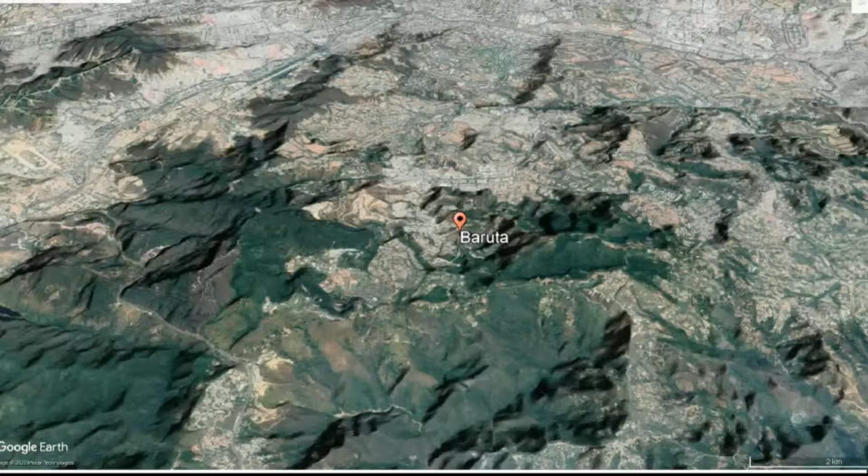Most of them have been built spontaneously. They function as villages with hybrid uses promoted by their own communities. Some have developed urban facilities according to their needs, creating their own communal spaces, but lacking public open ones. Others are monofunctional residential areas, meaning their inhabitants have to commute for other activities.

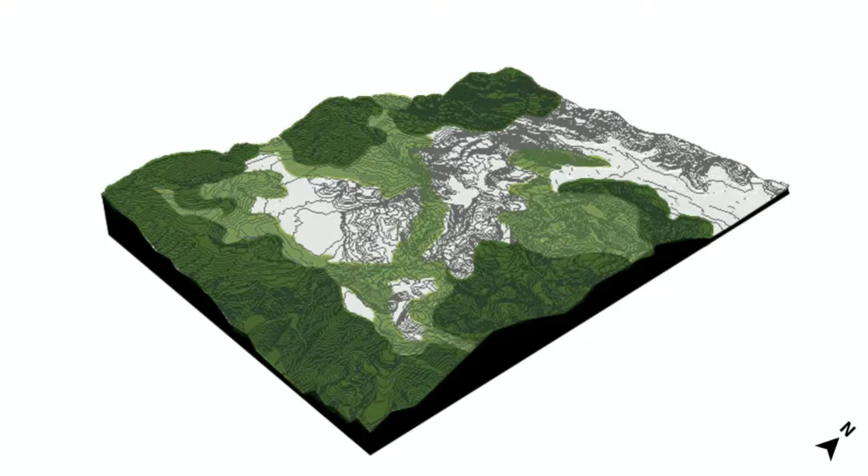To summarize, Baruta's landscape and the lack of urban planning caused urban fragmentation, ending up with constructions on risky zones, poor connections, and pollution of natural resources, in addition to the presence of only two main attractor centers, leading to an uneven concentration of urban dynamics.

So, understanding Baruta as a system of urban islands contained by nature, how can we link them?

The first one has to do with connectivity, where pedestrian routes are improved, new ones are made, and urban elevator systems are implemented, to achieve a well-integrated area. This, along with the improvement of roads and implementation of superficial transport routes.

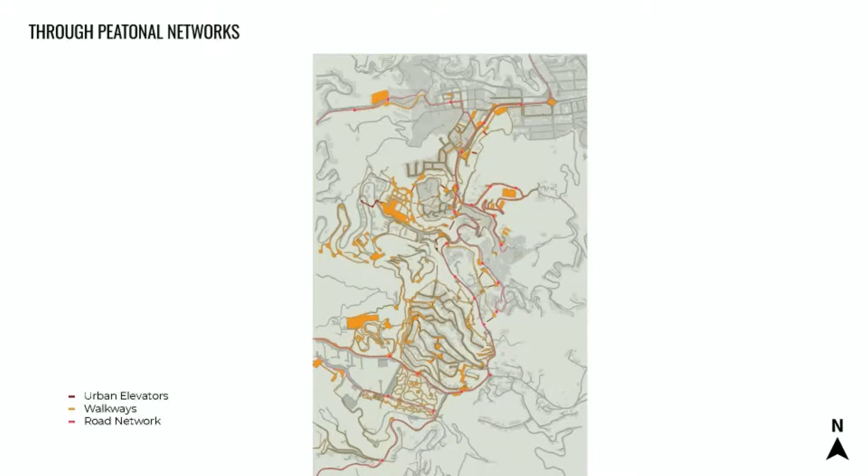The second one has to do with greenways. The idea is to provide the much-needed public spaces through linear parks where different activities can be held.

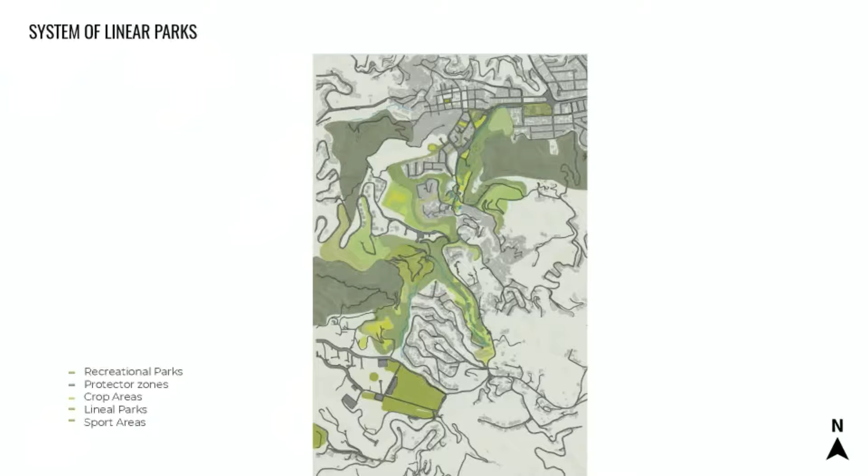And the last one, the third network, has to do with urban facilities. They will be multifunctional for a variety of purposes, adapting to communities' needs.

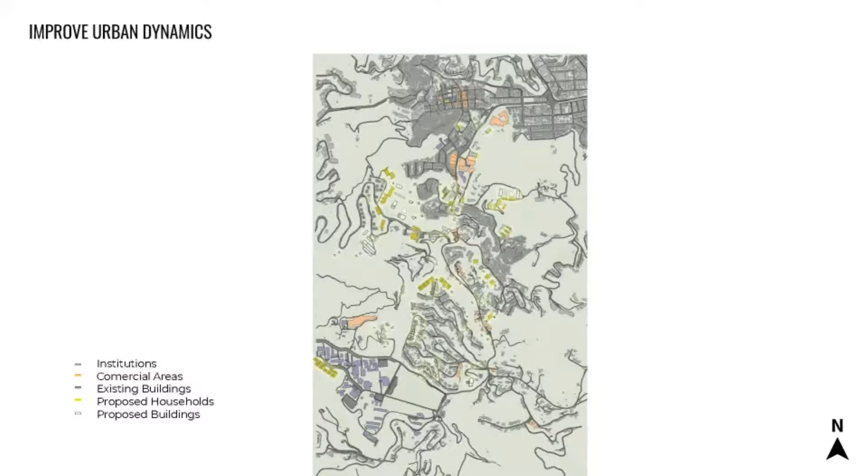To better understand all these systems working together, we chose to focus on four nodes with different urban dynamics, to see how they interact with each other.

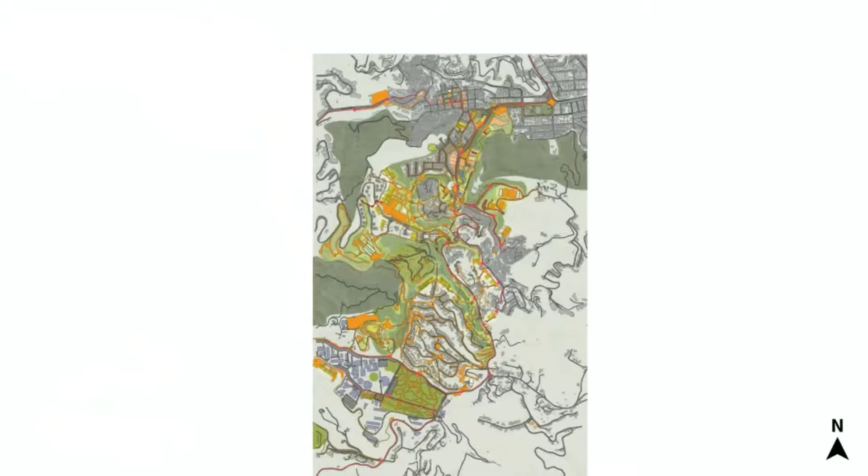To the north of the sector, we have what we called Lineal Park La Guairita, where there is the presence of diverse commercial and residential areas that lack public spaces and mobility systems.

So we look for connections from La Trinidad to La Limonera, generating alternative pedestrian routes and improving existing terrestrial transport systems. These mobility networks will work along with public spaces that help integrate the existing areas into the urban dynamics.

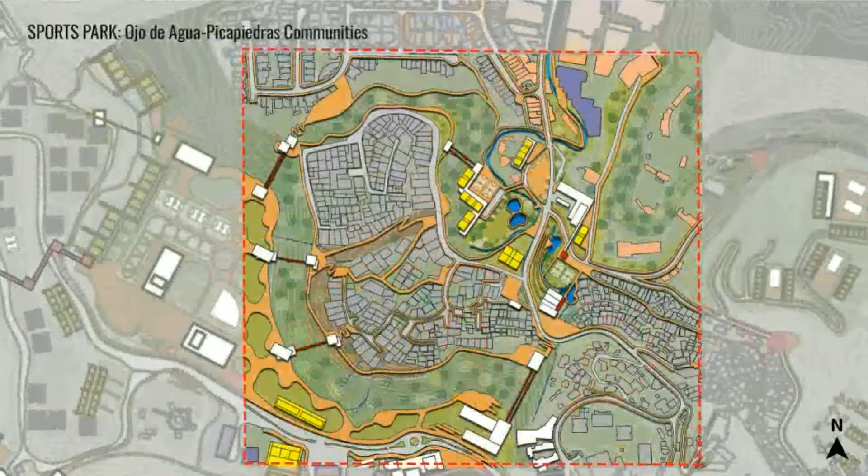At the south of the corridor, we've detected a strategic point that could work as an urban articulator that seeks to generate visual and physical connections between the neighboring communities to enhance their integration.

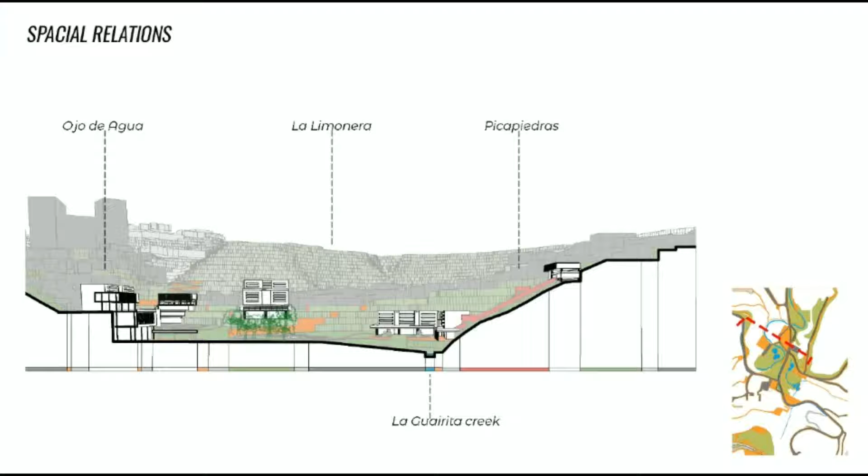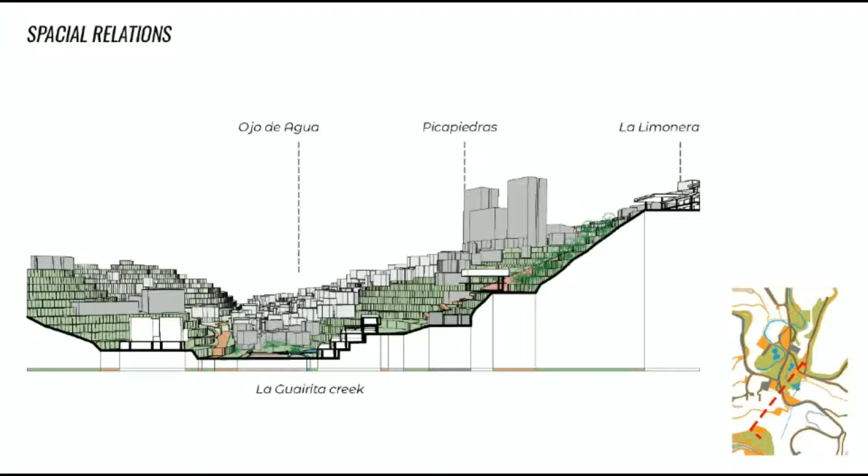Using as criteria the creation of open recreational spaces contained by hybrid facilities that work along with urban elevators and buildings adapted to topography, providing vertical connections.

So, to make this place, full of disconnected fragments and an unnoticed grid, and with lack of public spaces, work as an attractor node, we have decided to implement a network of sidewalks, stops, and public spaces to revitalize the place.

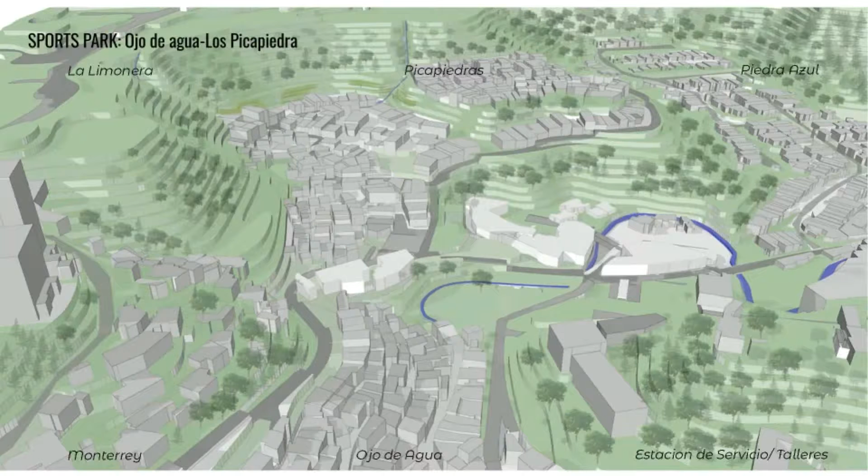Then, urban elevators will establish vertical connections related to these spaces and urban facilities. Therefore, a network of local parks that holds sport and recreational activities will be established to promote integration, not only between communities, but with nature.

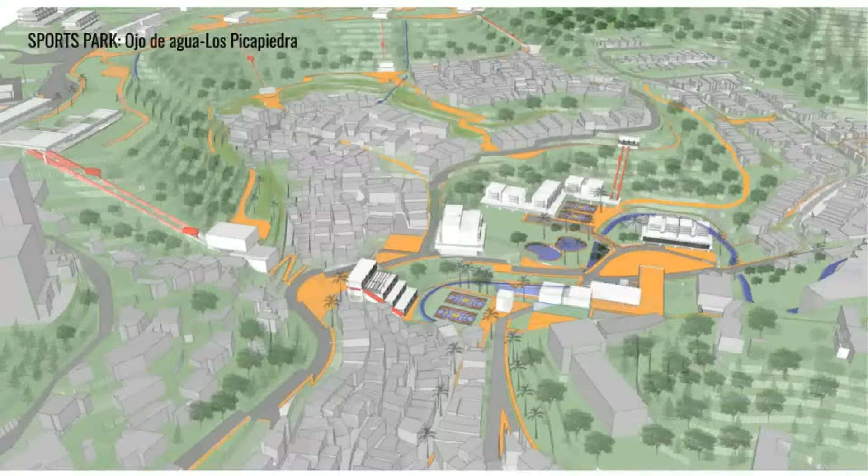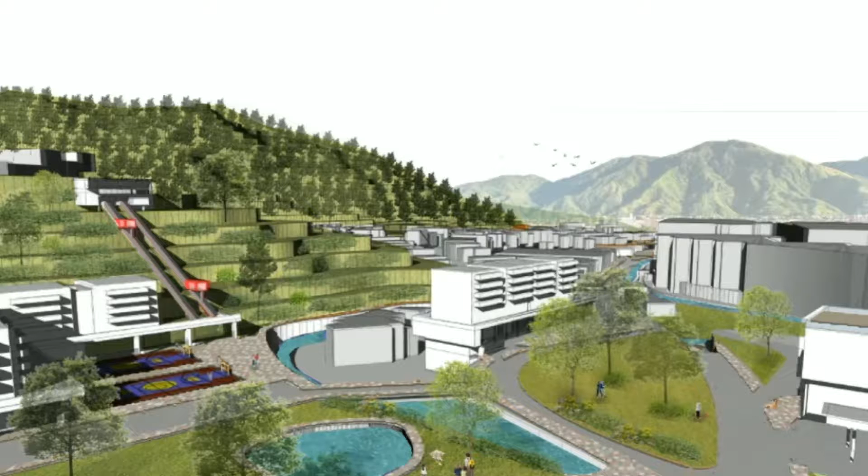And while further vertical connections are implemented, new hybrid residential areas will be established to help keep spaces vital. So, multipurpose public spaces will take place to incentivize community integration, providing new facilities in relation with natural features of the place, such as La Guairita Ravine and the steep slopes, promoting a sense of attachment.

Going to the south of La Guairita Park, in order to take advantage of the wide space available in La Limonera, the development of an urban park is proposed as a core of the overall proposal.

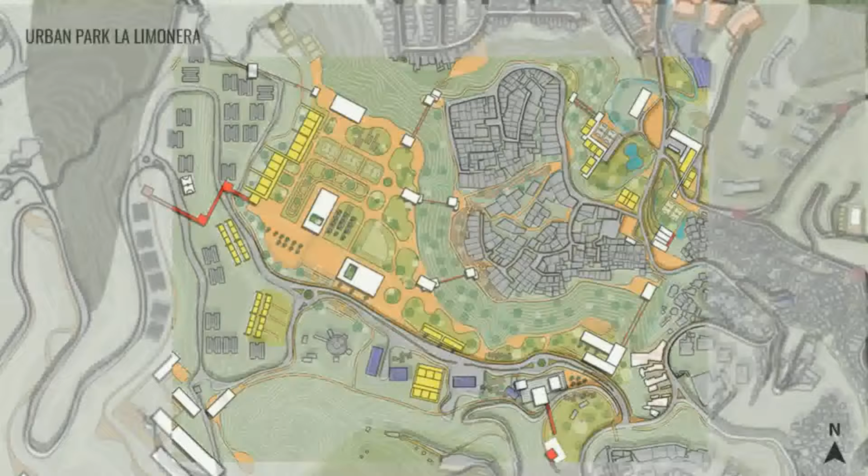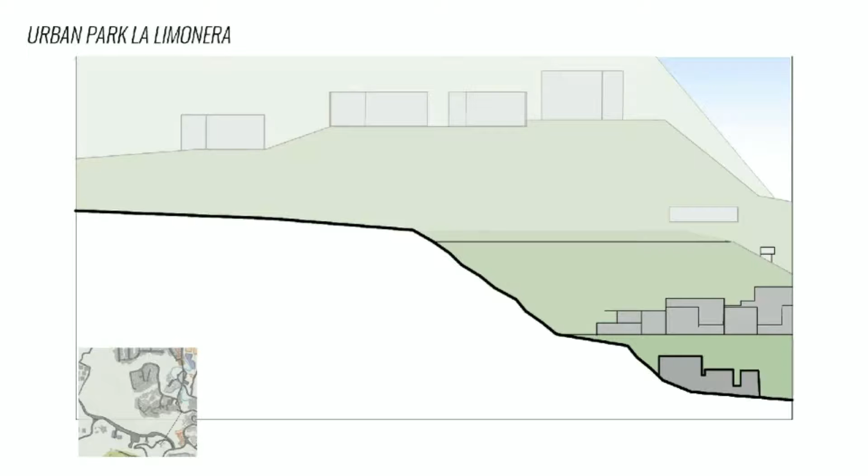Currently, the north and south sectors of the study area are disconnected due to the marked difference in level that the existing slope presents. It constitutes a physical barrier between both sectors. Also, it is important to acknowledge that this whole area settles on risky and unstable terrain.

In order to preserve and enhance the pre-existing urban dynamics, a new urban park is proposed, with the purpose of linking and integrating the surrounding communities. The project contemplates

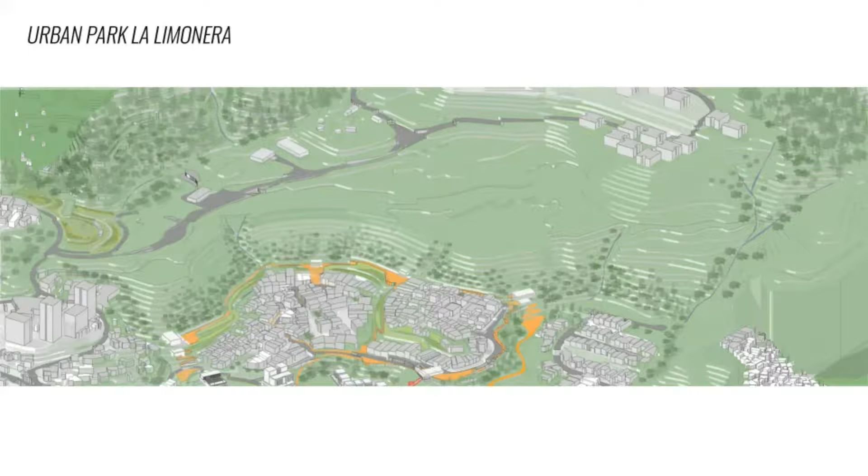a system of inclined lift elevators that bridge the topographic difference between the territories. The delimitation and protection of the high and lower edges of the slope through the development of a network of parks and public spaces, which interlaces existing urban facilities while new ones are proposed. Also, new areas for future housing development are considered.

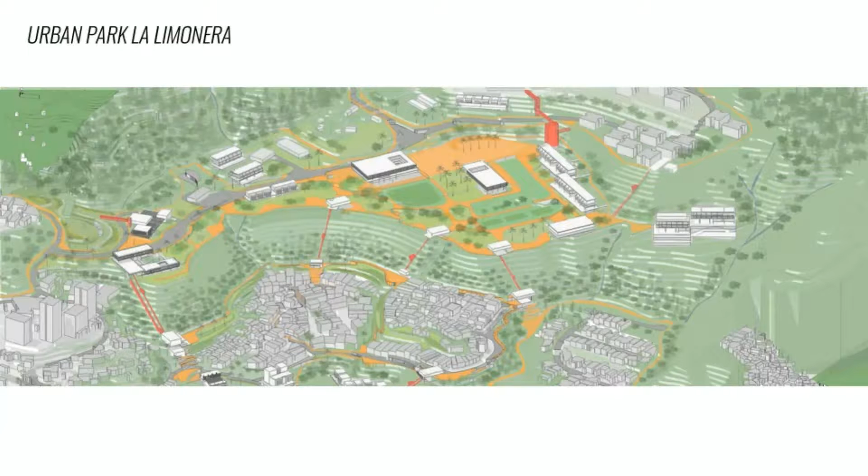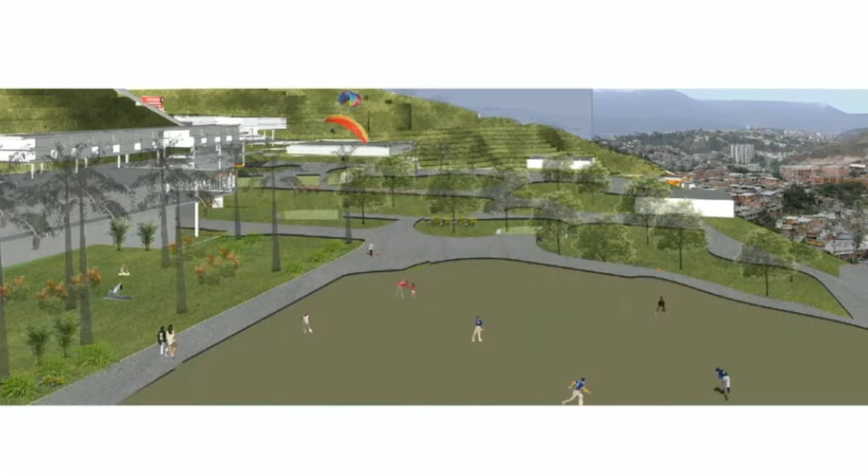Thus, the system seeks to provide spaces where buildings are harmoniously integrated with the environment, promoting enjoyable and pleasant spaces in which communities can interact with each other.

On the south of the site, two corridors related to Sartenejas Creek can be found. One of them is Sartenejas West Corridor. In this sector are activities related to the natural environment and the protected zone's biodiversity. There is also the presence of recreational spaces and institutional areas such as Simón Bolívar University.

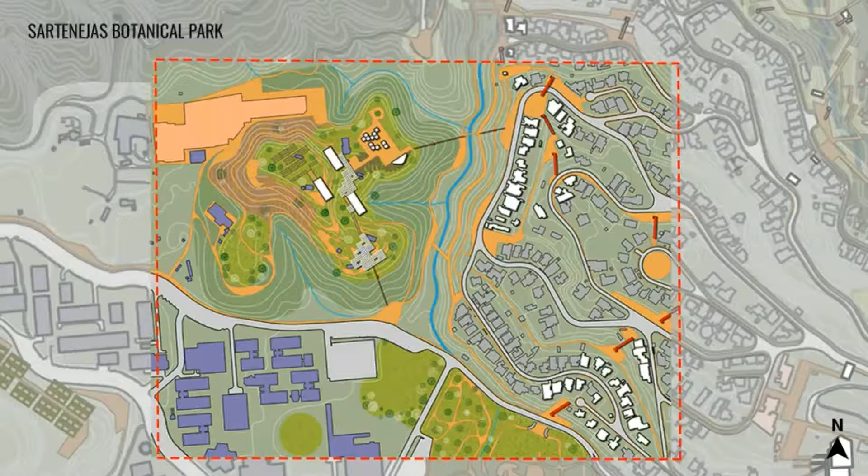In order to enhance these dynamics and the beautiful nature surrounding the place, a botanical corridor is proposed that would create vertical relations between La Limonera centrality and the university, promoting activities related to the natural ecosystems and its preservation.

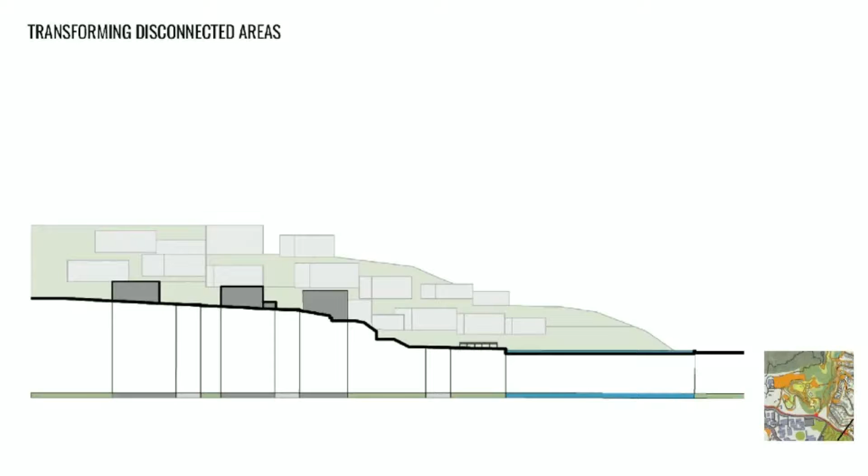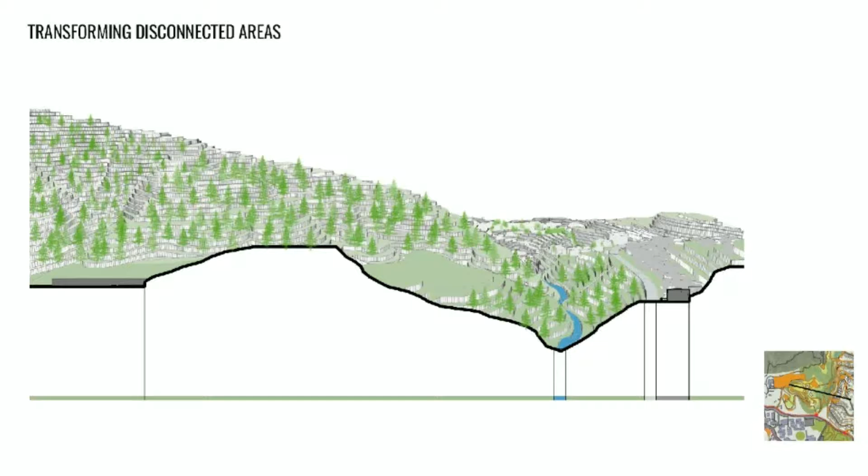To create these connections, a node will be developed to integrate the different spaces in the site. This node will work as a joint of urban shortcuts. The intention is to take the potentialities of the pre-existence and unify them with new dynamics.

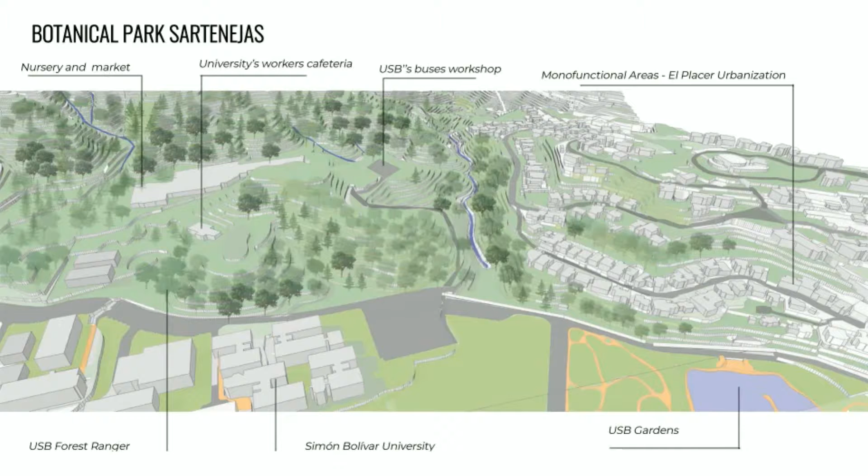The intervention will generate vertical connections through urban elevators. Related to public activities, this will create an urban circuit where the multifunctional square will represent the main social and cultural public space. The garden will be controlled by a botanical institute and a local market that will be associated with the existing university nursery.

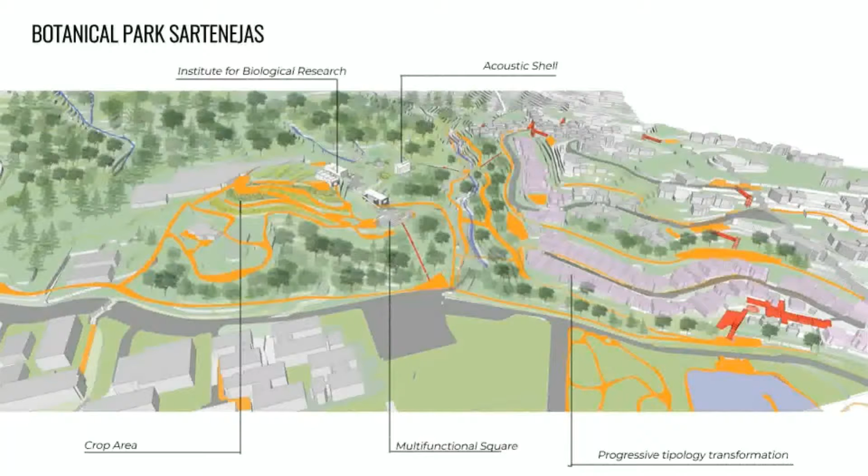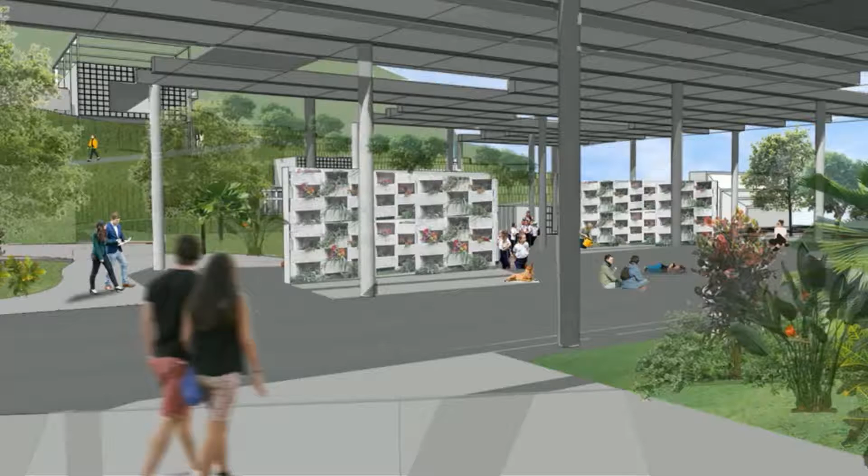So, where there were empty, underused, and abandoned spaces, in the future will represent a space to connect communities and nature, a space to share, admire, and preserve.

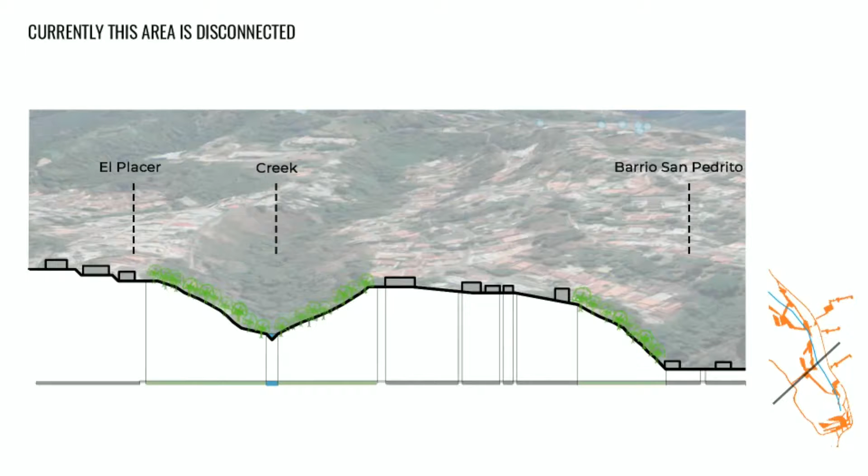Towards the east, a different approach is proposed, with the integration of an ecological park located along the ravine between El Placer and BARUTA's main road. Currently, this area is disconnected. El Placer is a gated community and the steep slopes make mobility around the place harder, leading to isolated neighborhoods.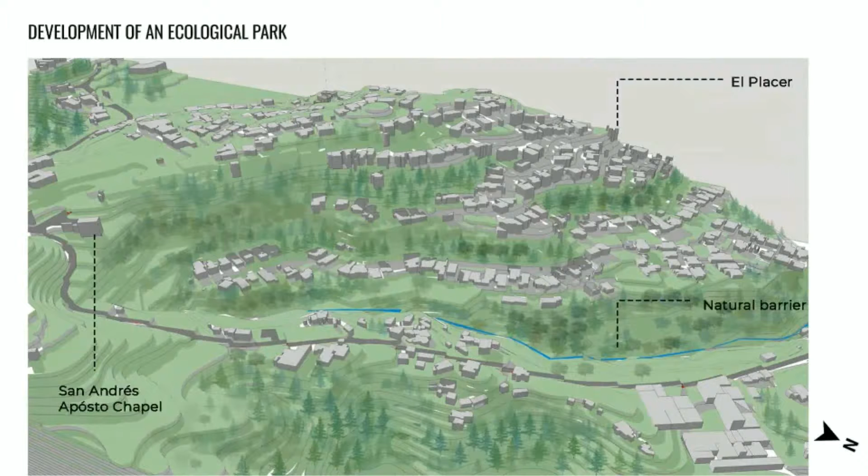So the creek becomes a barrier between the surrounding neighborhoods. Therefore, the development of an ecological park is proposed.

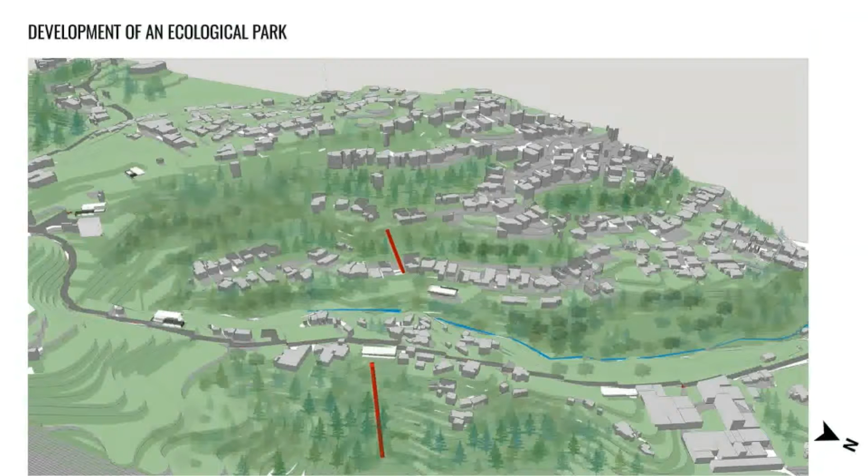It consists in the implementation of urban elevators, which can help connect the highly-dispersed urban facilities which promote local economy by working alongside the existing ones, and public spaces where the different communities can go for recreational purposes. Also, there is a housing plan for future development.

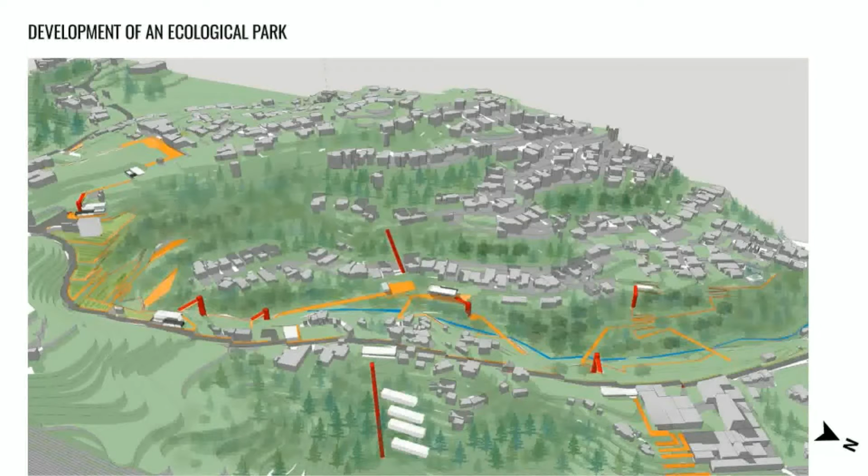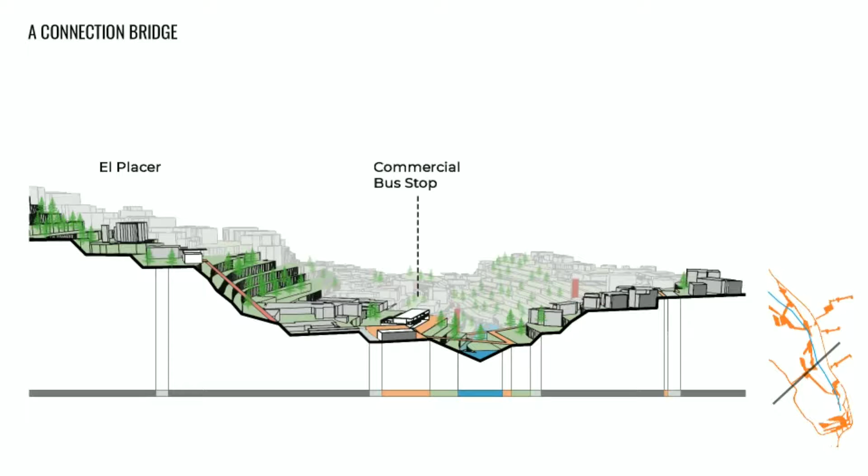In this way, both the ravine and the main road will no longer appear as barriers, but rather as bridges, along which a varied range of activities can be found and spaces full of life can be enjoyed and cared for.

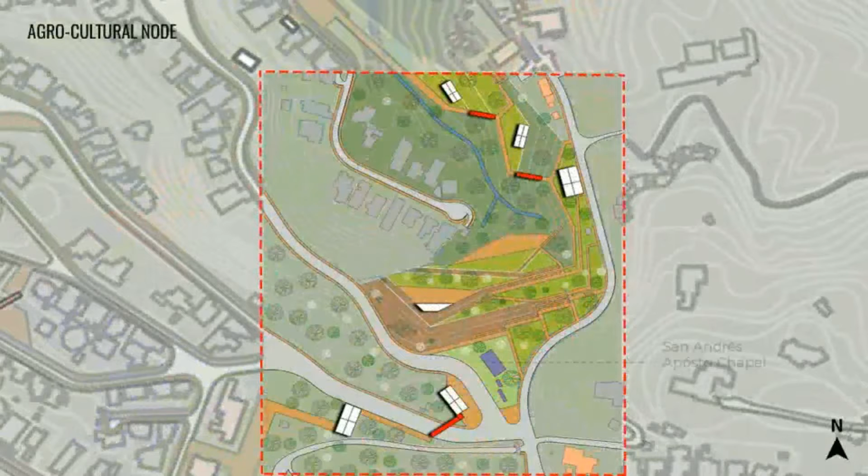As an example of how this space works, there is the one located north of the San Andres Apostol Chapel, where crops can be grown to share with the communities. This space connects to the rest of the park through platforms and elevators with the main road, forming an interplay of varying heights along the creek.

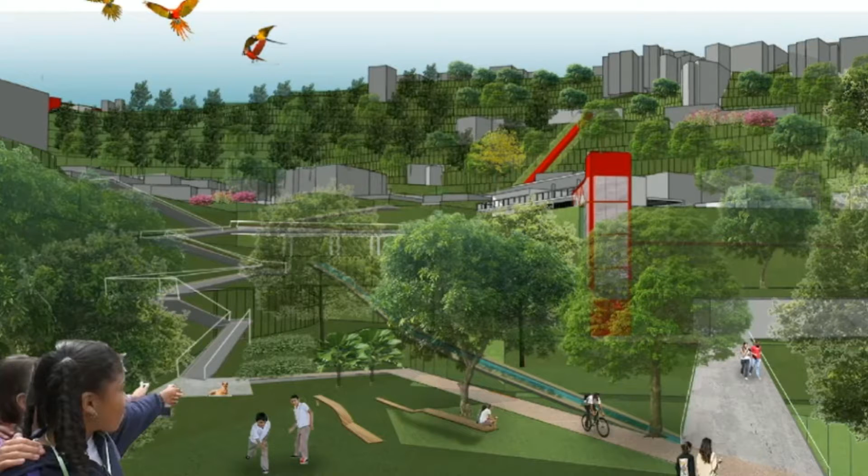Like this, a new opportunity is opened for the surrounding neighborhoods to bring to life a forgotten space with a lot of potential to become a place where community exchange is produced.

The intention of these four proposals is to check that this multidirectional network system, from a pedestrian scale, can be implemented in different conditions in such a complex territory as BARUTA is.

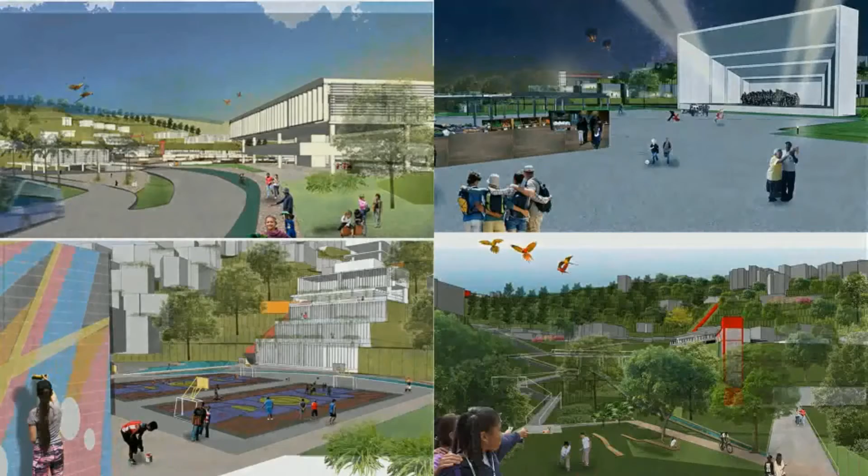Linking BARUTA is about interconnection between communities through shortcuts and alternative routes that integrate different public spaces that work as sutures of the fragmented urban islands that conform the place today.

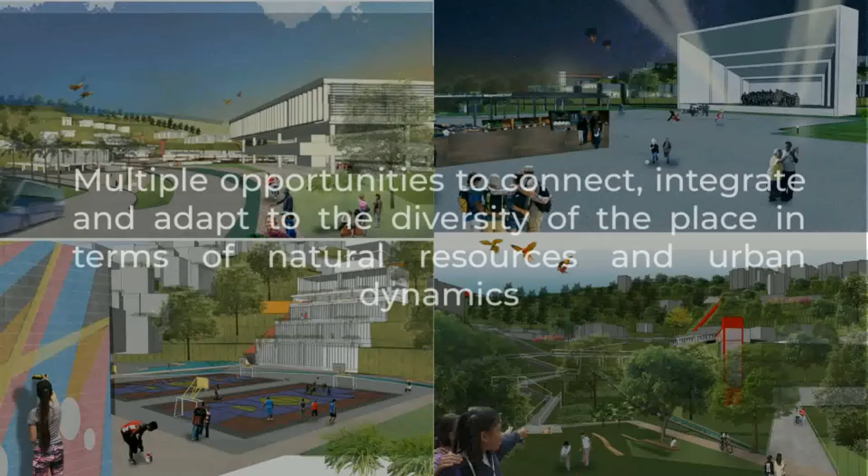The idea is to stop perceiving steep slopes as barriers and find in them multiple opportunities to connect, integrate, and adapt to the diversity of the place in terms of natural resources and urban dynamics.